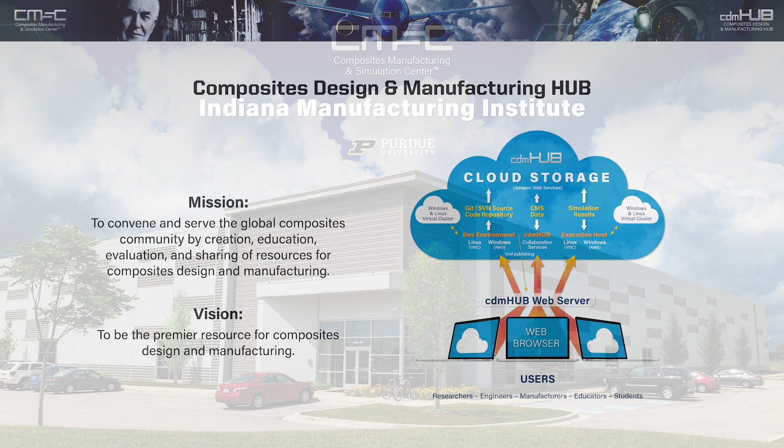We launched the CDM Hub in 2013 with the mission to convene and serve the global composite community by creation, education, evaluation, and sharing of resources for composite design and manufacturing.

CDM Hub provides a very powerful website called cdmhub.org for the composite community to carry out this mission together. We envision CDM Hub to become the premier resource for composite design and manufacturing in the near future.

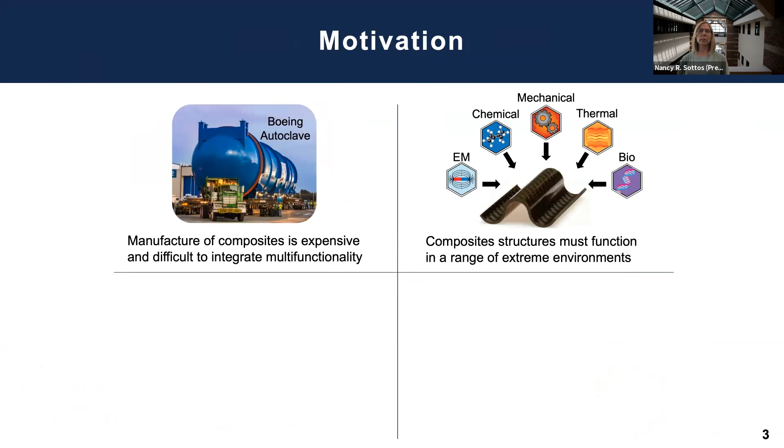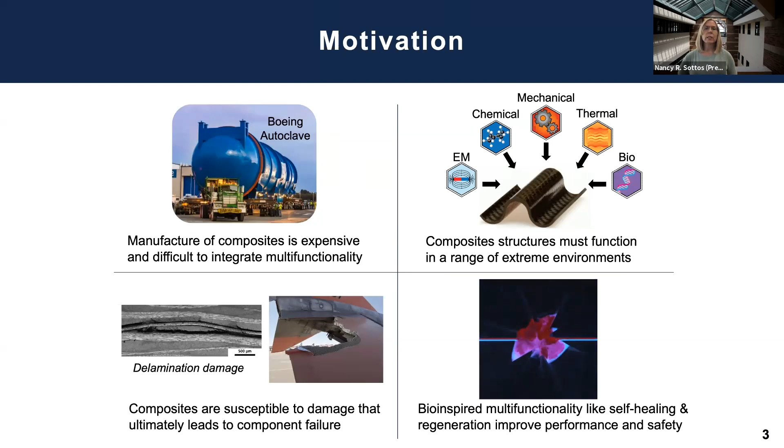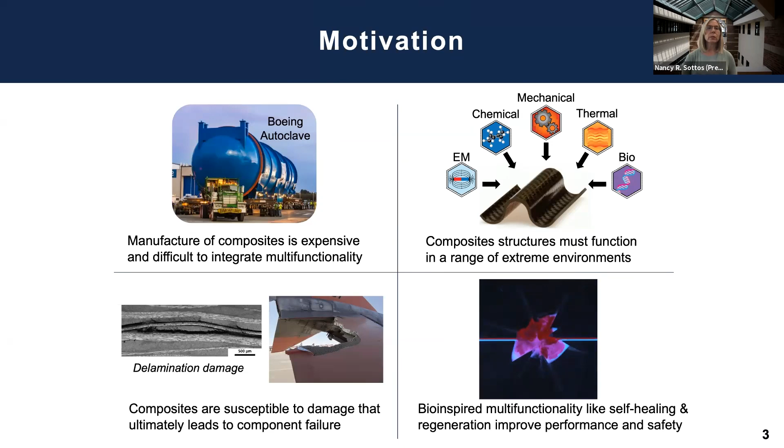In addition, composite structures must function in a range of extreme environments throughout their lifetime, and so they're subject to all sorts of damage that ultimately leads to component failure. My group over the years has been looking at different bio-inspired functions that can address these damage questions, like self-healing and regeneration, with the goal of improving performance and safety. My talk today, though, is going to focus on the manufacturing aspects, and I'll comment on multifunctionality and vascular structures towards the end of the talk.

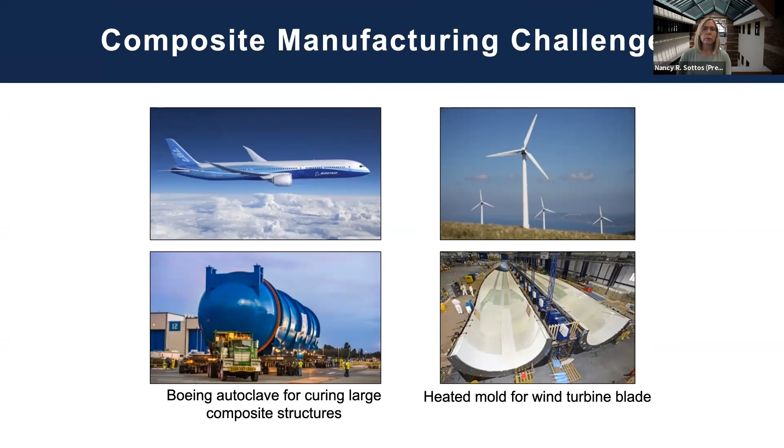I think everyone on this seminar series is well aware of the challenges associated with composite manufacturing. I show the large autoclave for aerospace structures, and also one of the large molds required for creating composites for wind blades. If we look at the well-known processing cycle for many aerospace-grade thermosets...

The first obvious element is that it requires lots of time, a minimum of 6 hours, sometimes longer, with high temperatures held for those long times, usually 2 dwells, and the heating rates are low. Sometimes the curing can be non-uniform, inducing residual stresses. The large molds and autoclaves require large capital investment and operating expenses, and you have to have these manufacturing facilities available. And of course there's a lot of energy input, which leads to CO2 emissions.

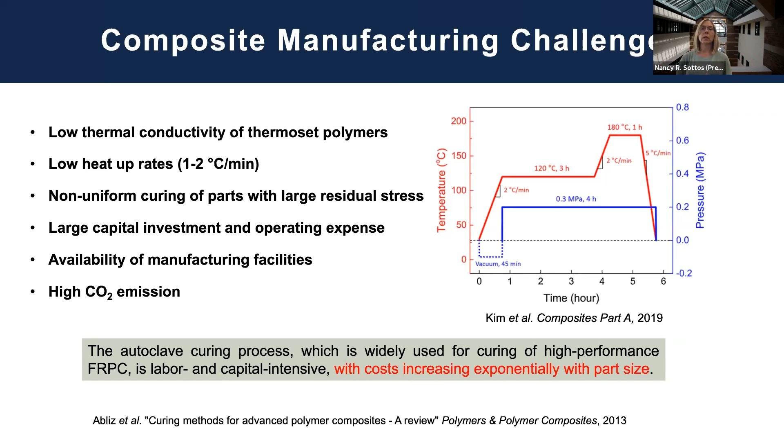So really the autoclave curing process that has been used for so long to make high performance composites is labor and capital intensive, and costs increase exponentially with part size because the autoclave has to increase in size with the part that's going to go inside of it.

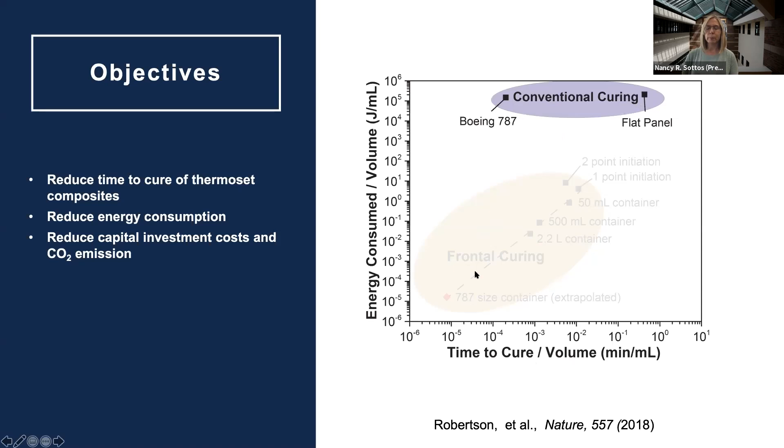So an outline for the things I'm going to cover today: I'm going to talk about a technique called frontal polymerization that we've been working on, which serves as a platform for our manufacturing methods. Then I'll talk about application to fiber reinforced composite manufacturing specifically, and finish with an exciting application to vascular structures and using this technique to make multifunctional composites.

Let's start out with frontal polymerization, and I'll assume many of you don't know a lot about it. This is a technique for processing polymers that has been in the literature for a while. If you're unfamiliar with it, there's a great review by John Pojman's group that references all the different polymers and monomers that have been polymerized using this technique. But let me tell you a little about what frontal polymerization means.

It's really like a controlled burn, but you start out with monomer. The monomer has to have a high heat of reaction. Then in that monomer, you also include a thermally latent initiator—in our case, a catalyst—and you need to stabilize that system to give you enough working time.

Then when you add a small amount of heat—think of it as a trigger that doesn't remain on—it starts the polymerization of the monomer. As I said, the monomer needs to be fairly exothermic. It generates heat, which diffuses forward into the surrounding monomer, generating more reaction, an exothermic reaction, which then diffuses forward, and the reaction propagates as a self-sustained front.

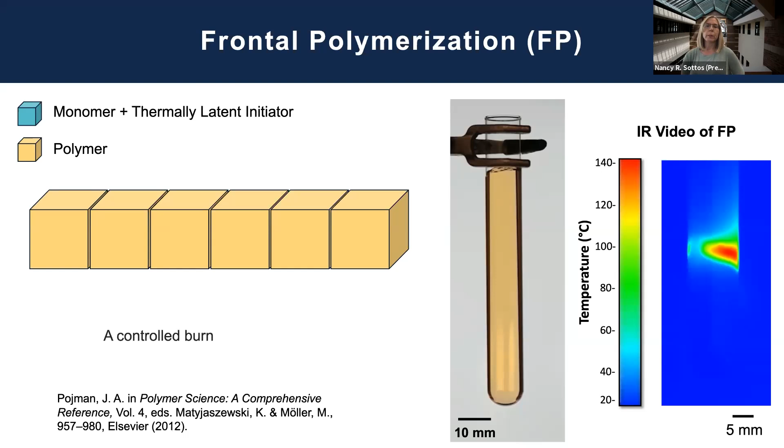If we look at this in an IR video—this is an IR of a different test tube, actually a little more zoomed in—it again started just after the point where it's been initiated with a soldering iron, just a small heat trigger. This will give you a feel for how the heat is generated due to the reaction.

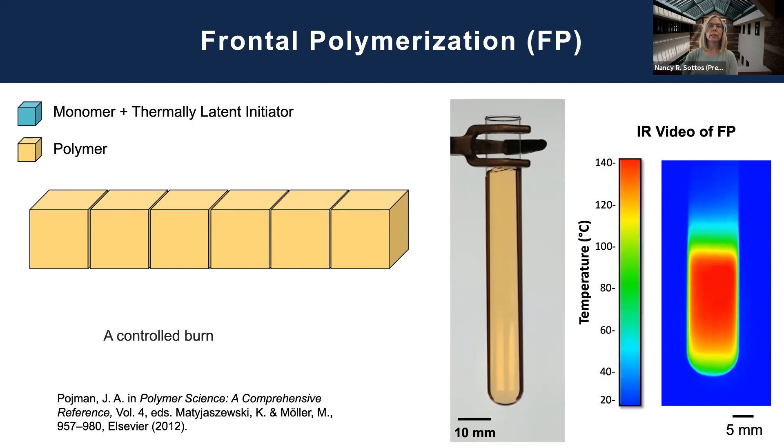And then diffuses and propagates down the tube. You can see red here is a hotter temperature. It starts to react, the heat moves forward, and the reaction front again smoothly moves down through the test tube, curing the monomer. Okay, and it's just about finished. If I take some snapshots and freeze them on this slide, you can see again that you start out with this stable monomer, and you can see the smooth propagation of the front.

I want to include the governing equations for this. This is a reaction thermal transport system where T is temperature, H of R is the heat of reaction—a property of the monomer. Kappa, rho, Cp are also properties of the monomer that determine the heat transport and diffusion. Alpha is the degree of cure, and I show the cure kinetics for a typical thermosetting polymer here. Alpha also depends on temperature and an activation barrier, E. We're able to analyze this set of governing differential equations to understand this reaction thermal transport process.

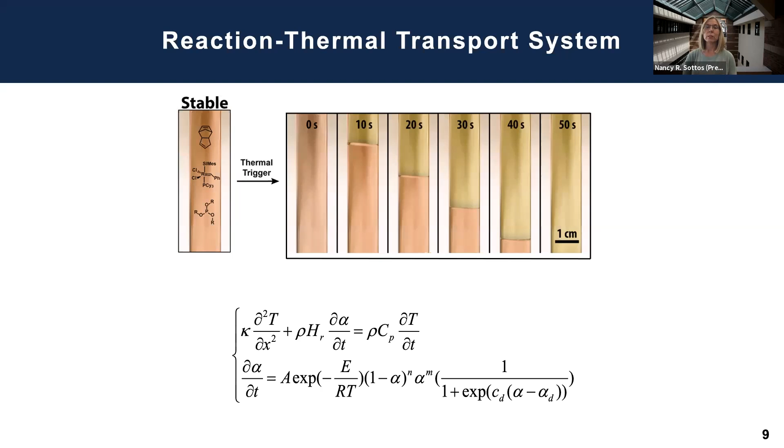Now, I won't have time to talk about the modeling this morning—that's the work of the Geubelle group. But we have a lot of predictive models that enable us to hone the manufacturing processes and understand them better, which I'm going to show throughout this talk.

Let me start out with the chemistry that our group has been focusing on, one particular monomer: dicyclopentadiene, or DCPD for short. We initiate a frontal ring opening metathesis polymerization using Grubbs catalyst, in particular GC2.

So the chemistry we're working with is the DCPD monomer. It's endoform, ethylidene norbornene, or ENB, that is added to make this a liquid at room temperature, along with the Grubbs catalyst. I'll say some more about these inhibitors, which are incredibly important for stabilizing the systems, and one of the big advances our team made, led by the Moore group.

What these inhibitors do in working with this monomer is allow us to move from the test tube, from a very small volume doing frontal polymerization on a very small scale, to larger molds. Here I just show a casting mold of our dicyclopentadiene monomer.

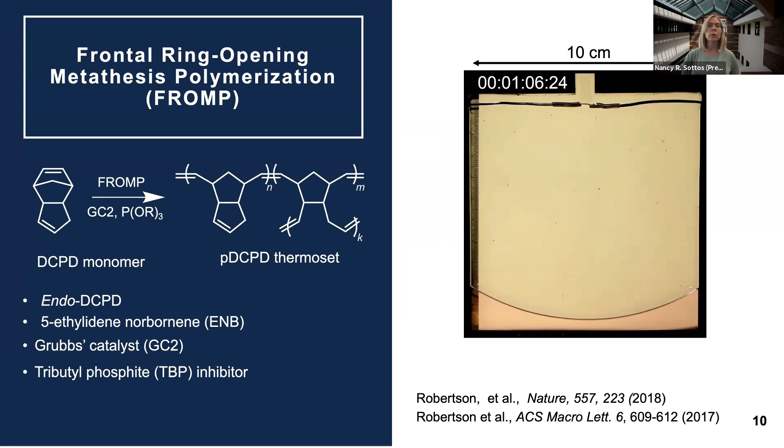The heat trigger here is a resistive wire, and it's only on for less than a second. You can see a smooth polymerization front progressing throughout the mold, and what we wind up with is a thermosetting polymer, polydicyclopentadiene, by the time all the monomer converts.

This thing is cured with just 6 joules of energy in 78 seconds on a desktop. The front velocity is about a millimeter per second. The degree of cure is quite high, but what's most remarkable to me is that the glass transition temperature of this material is 160 degrees C. It's got a Young's modulus of about 2 GPa and a good elongation of failure, about 50%.

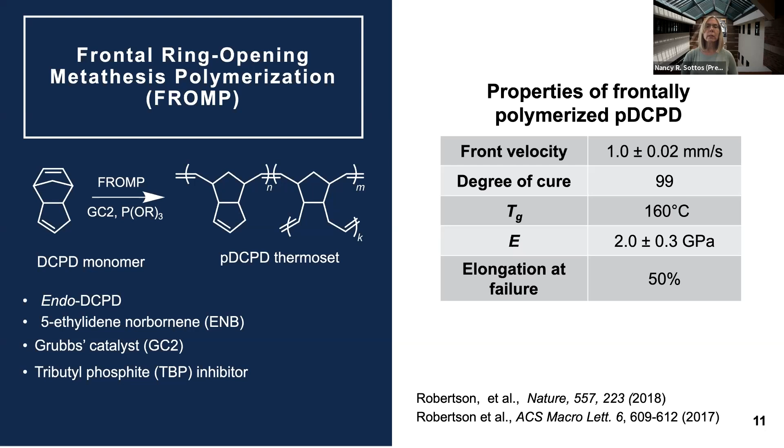So it's got great engineering properties comparable to those of an aerospace grade thermoset. Here I show a comparison of those properties to a typical aerospace grade BPA epoxy.

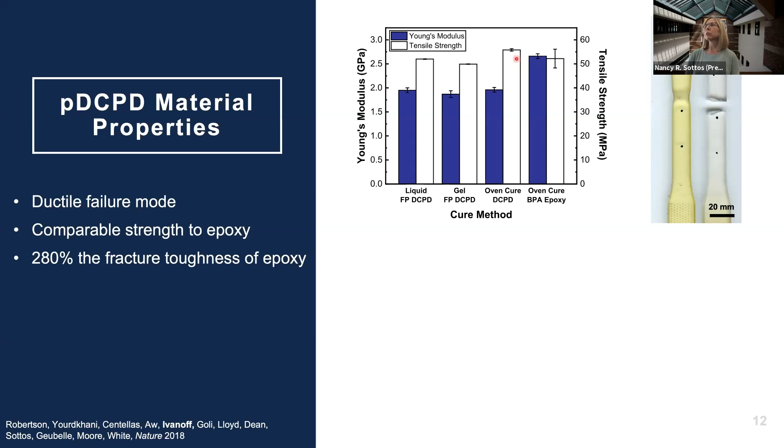When we started out, we were very careful to compare our frontally polymerized materials to if we just cured them in a traditional oven, versus a traditional oven or autoclave cure of the BPA epoxy, looking at the modulus. The modulus of DCPD is about 2.0 compared to 2.5 of an epoxy system, and the tensile strength or yield point is rather comparable.

What's also interesting is that dicyclopentadiene is a very tough material. Its fracture toughness is about 280% greater than that of a typical aerospace epoxy. So it's quite a high-performance polymer.

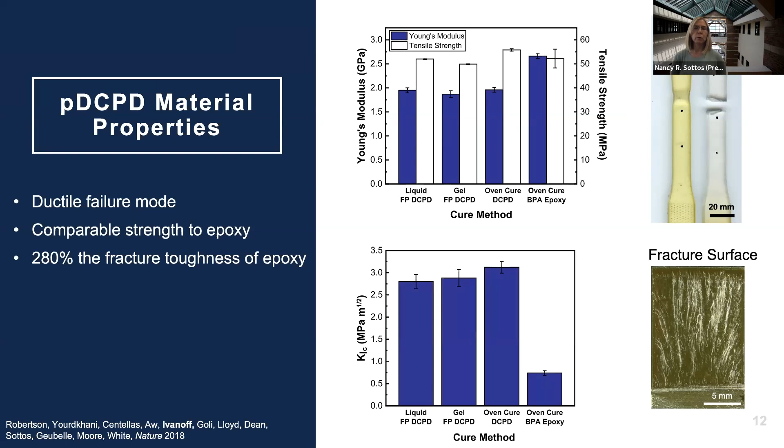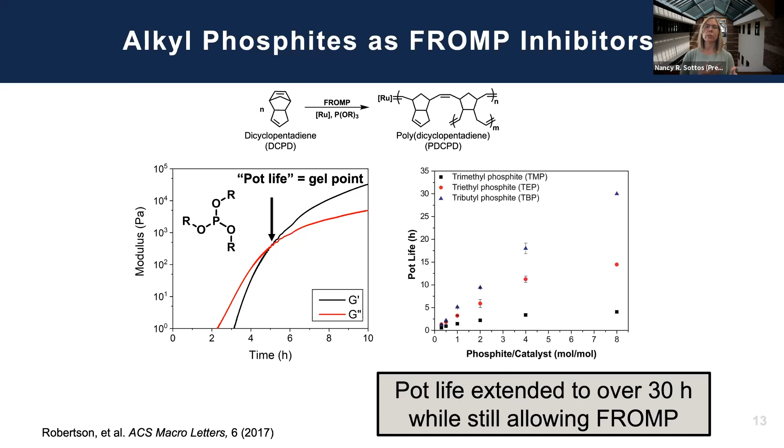The amount of this phosphite inhibitor lets us tune where this gel point occurs. So we can look at a plot of pot life or gel point as a function of inhibitor and catalyst concentrations. What we found is that with these inhibitors, we're able to get over 30 hours of pot life in some systems, which enables us to do larger molds and structures, and as you'll see as I go through the talk, enables a lot of different things.

The other thing we discovered in this system is that with the use of these inhibitors, we have a lot of control over the rheological profile, and that control over the rheology really enables high fidelity in our manufacturing processes as well.

By tuning the gel point with the amount of inhibitors, we have three different regimes. Two are useful, but one is important to realize where it is. The first is what we call liquid FROMP, or frontal ring opening metathesis polymerization—meaning we polymerize from the liquid, like in the test tube and the casting cell I showed before. This is very useful for resin infusion of composites.

If we let it go beyond the gel point—this was actually a very surprising fact to us—we can go beyond the gel point and there's still enough energy to frontally polymerize, which enables us to process from the gel and do things like 3D printing and gel shaping, as you see here.

And then finally, if this goes too far, beyond the pot life, a background reaction will take over. It'll polymerize into an undesirable polymer, and you just don't have enough heat of reaction (HR) to propagate the front. So you want to stay away from that zone.

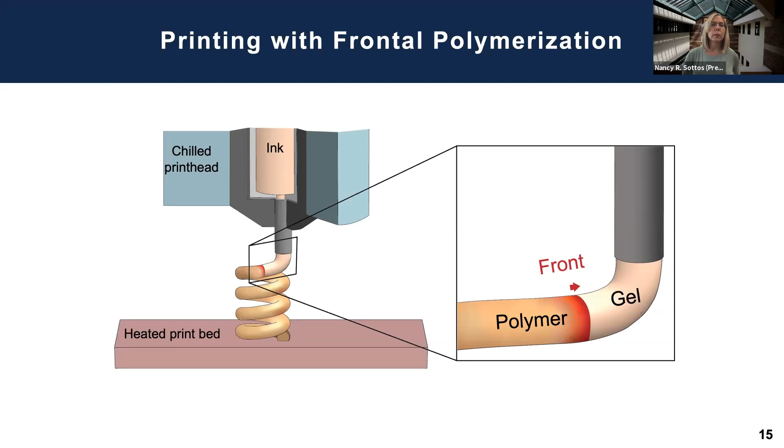We use a heated print bed to trigger the front, and as you'll see, the front then is able to follow the print head, and we're able to cure in real time and basically 3D print on the fly. So I'm going to show an example of freeform 3D printing in air.

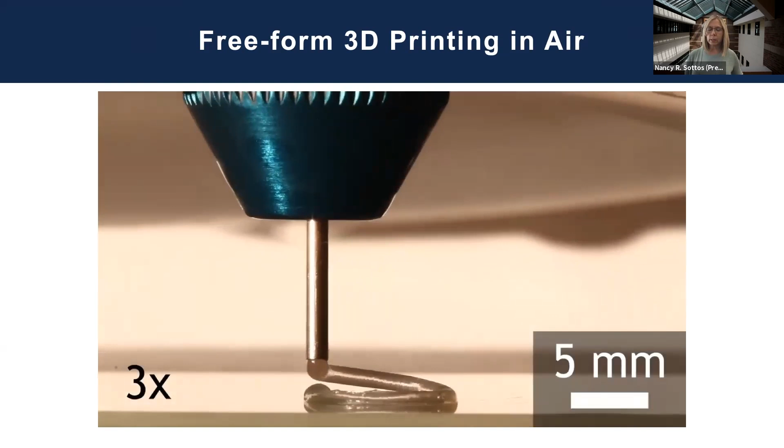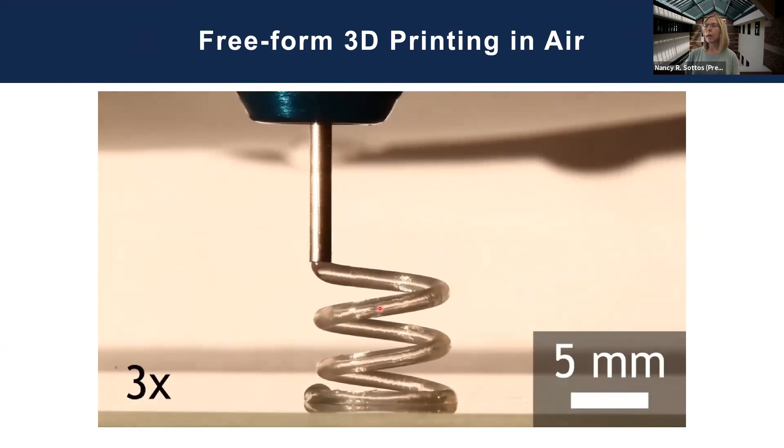This has been triggered on the heated print bed, and as this cycles up, you can see the front here chasing the print head as it goes through this freeform spiral. Everything behind the front is a cured thermoset polymer, again with a Tg of 160, and it's just gel in that small segment close to the print head.

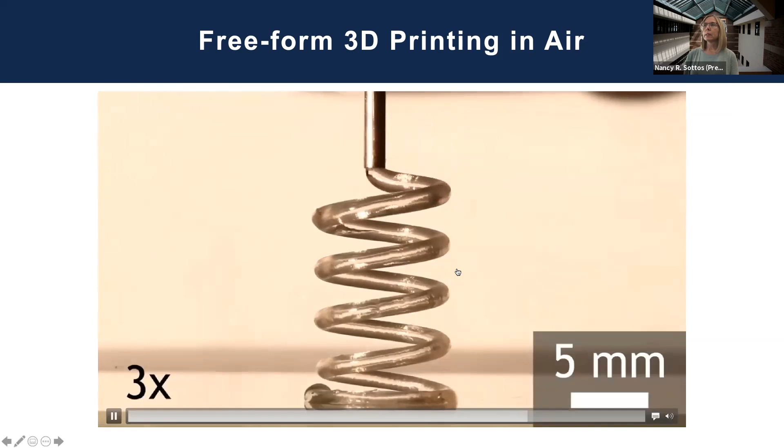You see this video will finish soon. And when it completes, you can see it's fully cured thermoset. There's no secondary curing necessary.

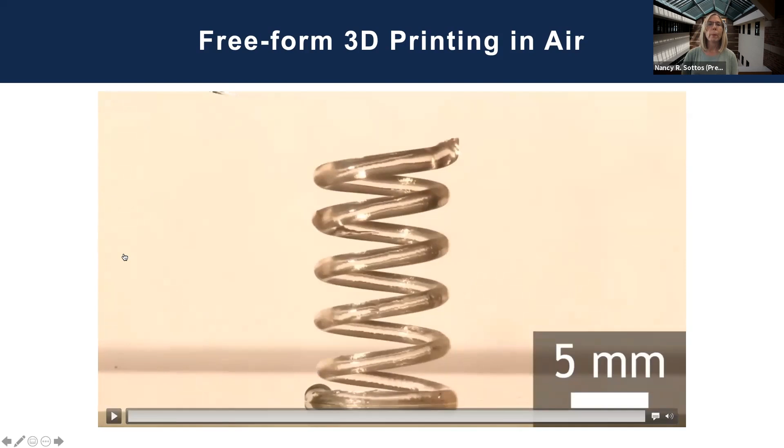I don't have time to discuss all the interesting rheology and different things that we're doing with printing for this presentation, but I picked one example, also just to show the layer by layer capabilities of using different nanofillers. That's definitely an area we're interested in, working on and adding different nanofillers, carbon fillers, as well as even thinking about continuous carbon fibers.

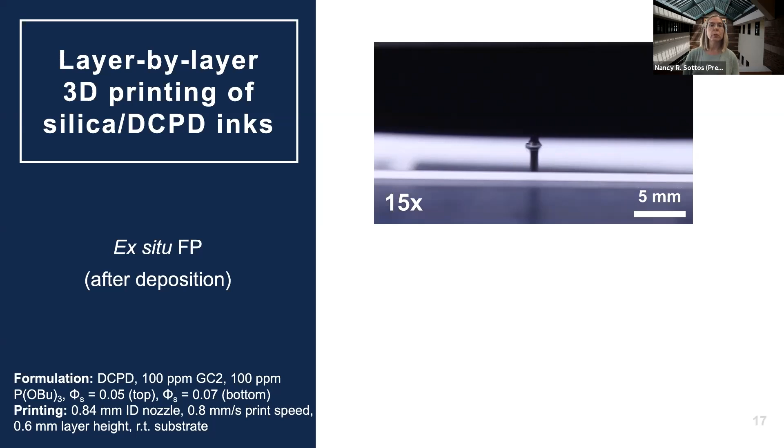In this case, I show an example of layer by layer printing where we've added fumed silica nanoparticles to the DCPD. It also gives us another knob to tune the rheology, and you can see that we can create an ink with a very different viscosity. This one's gelled a little differently, and here we're just creating an annular structure, layer by layer.

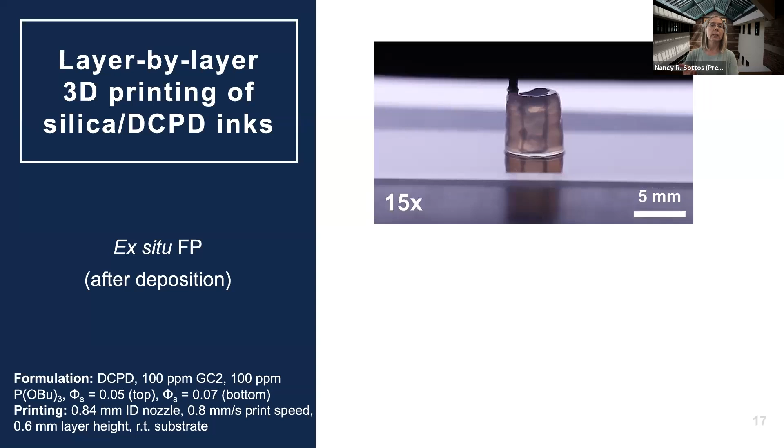This is a little bit different example, because instead of curing on the fly, in this case we're just writing with the gel-based ink. As you'll see, the frontal polymerization is going to be initiated ex situ.

So there's our structure, and there's the soldering iron in this video. You can see it's just going to be touched there for a second, and this whole thing will now frontally polymerize after the fact. So that's a case where we're not using the heated print bed—we're polymerizing afterwards.

We can also photothermally initiate these frontal polymerizations in our printing process. It gives us the ability to make a lot of different types of structures and combinations of layer by layer and freeform printing as well.

All right, so let me move on to the fiber reinforced composites manufacturing. As I mentioned, this is going to happen from the liquid state, so we have a working time of several hours.

The way that we've chosen to make our composites in this initial work is using a resin infusion process. In particular, we're using a vacuum-assisted resin transfer molding process and infusing our DCPD monomer into woven fiber mats. In this case, it's a Toray twill carbon fabric. Basically, everything else, once you infuse the resin, is very similar to a normal RTM process, except that we're just going to initiate this with a small heat trigger.

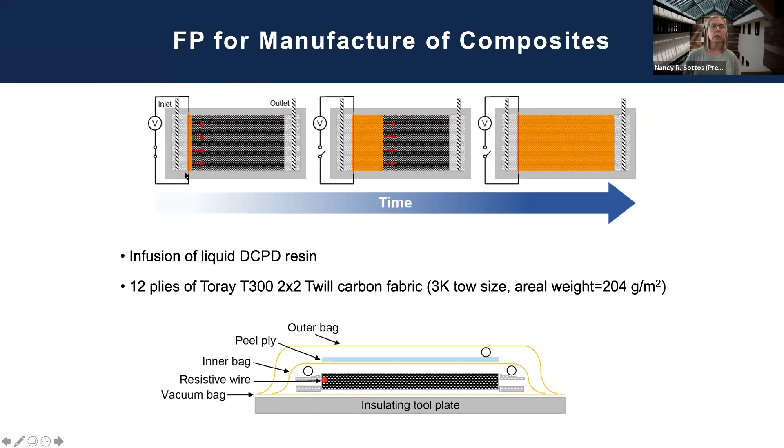The location of the trigger will vary, but we started out with the trigger on one side of the composite and let it move smoothly, the front propagating across the panel. So that's what I'll show first.

So we start out with this single trigger processing configuration. There's a heat trigger, and then the resistive current is just turned on for a short while, and then the front propagates across the panel. What I'm going to show you below in the video is an IR image where the IR camera is looking down on the panel.

This is a fairly good sized panel, a 10 by 20 centimeter panel. You can see the current is on—that's just how we initiate it. The front starts moving across the panel, and we get this stable propagation as the exothermic reaction occurs.

We are able to fully cure this panel, a 10 by 20 centimeter panel, in just 2 minutes, again on a desktop with very simple tooling.

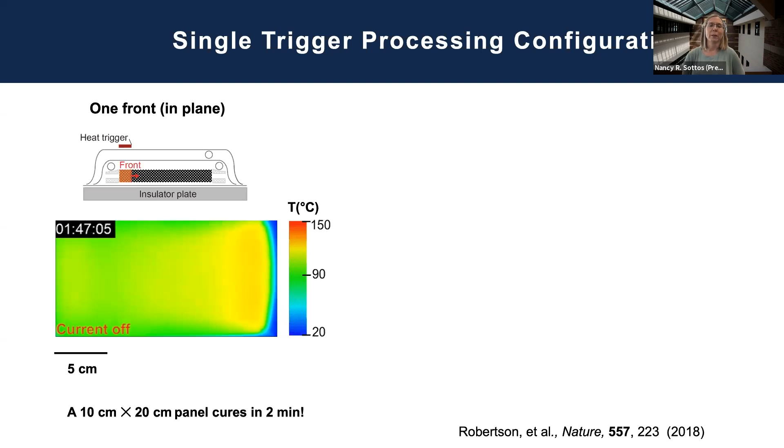We can make larger panels and more complex shapes, and the volume fraction for this woven material is about 51%, with very low void content. We've moved to a system with no solvent in the resin, and the TGs we've achieved approach 160 degrees C for the composites.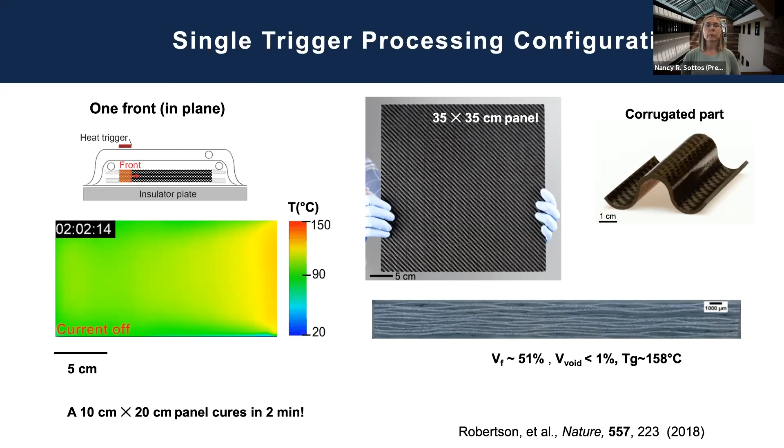It looks like everything's working well in the video, but there's an important effect of adding fibers and other fillers to the frontal polymerization process. Every time you add filler, it's not reacting, not generating heat, so you're taking away monomer that generates the heat necessary for processing.

If we look at a plot of front velocity as a function of fiber volume fraction, initially as we increase fiber volume fraction to say 20%, there's actually an increase in front velocity. That's because the fibers are more conductive and let the front propagate more smoothly across the panel. Then as you add more fibers and reach higher volume fraction, the front starts to slow down again and can actually stall, because you have less monomer there.

In addition, the maximum front temperature comes down as I add more fibers, because the front is less hot due to the heat dissipation, and that's also important.

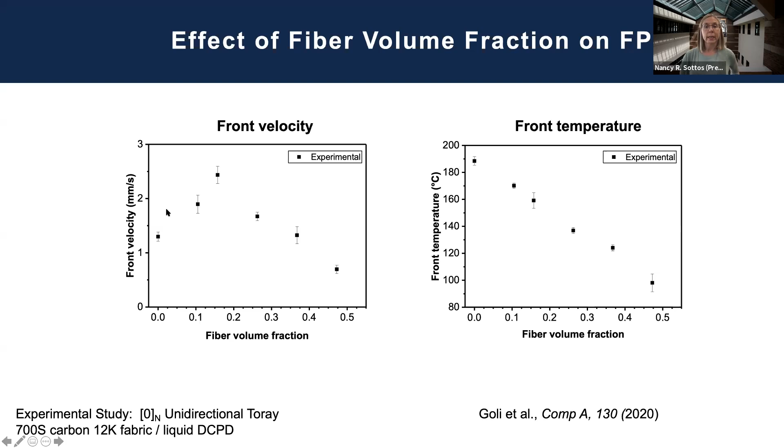There's a recent paper on this led by the Geubelle group that was able to predict these experimental trends quite well, helping us numerically predict the processing windows we need.

In order to get volume fractions up and address these issues with increasing fiber volume fraction, we thought a lot about how to modify the boundary conditions. Our initial layup, as described before, led to volume fractions of about 52%.

We've done a lot of work modifying this using insulative plates, so the laminate is compacted between two insulator plates, and we also add some compaction pressure to the process, whereas in the prior example we weren't doing any compaction. This does two things: it minimizes heat losses and increases fiber content. You can see we get a nice 62% volume fraction composite shown here.

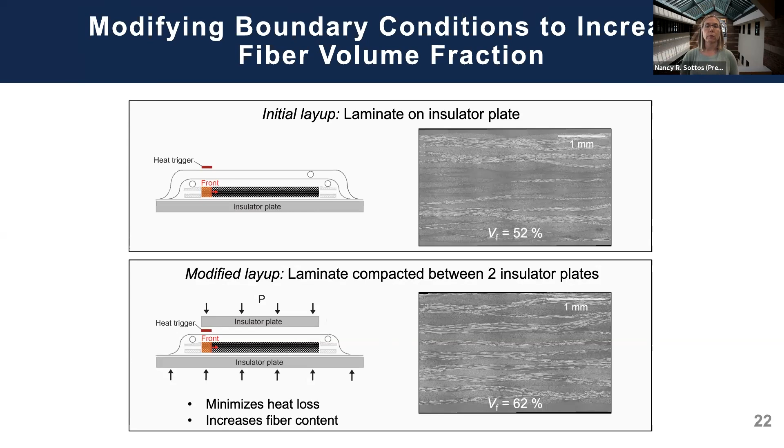So the compaction step works quite well and is helpful for producing high quality composites. As parts scale and get larger, you're asking a lot for a front to propagate meters, so we looked at different alternate triggers to reduce cure time and the distance the front propagates.

We've studied two fronts, triggered from either end of the panel in the plane. They're going to meet in the center - I'll play that video. You can see the current's on, it's triggered, then the current is off, and these two fronts come together and merge.

You'll see there's a bit of an exotherm when they merge, and this is something we have to manage and have looked at how to minimize. We've also looked at a through-thickness cure, where there's a heater at the bottom and it cures through the thickness of the material very rapidly.

In fact, the two-front cure takes half the time of the one-front case, as you might expect. The through-thickness cure takes about 30 seconds as we go through the thickness, and that's an exciting technique for more practical manufacturing.

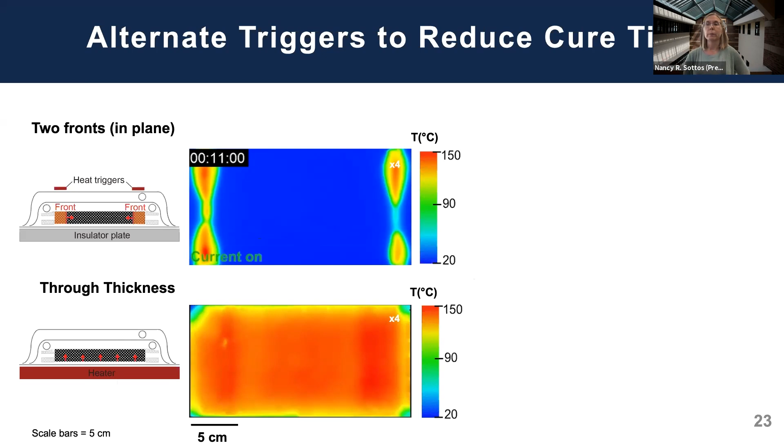If we compare these, there's a bit of a trade-off between a faster cure time, because we need to put more energy in, say, for the through-thickness case. The cure time comes down from 2 minutes to 1 minute to approximately 30 seconds to cure a composite panel.

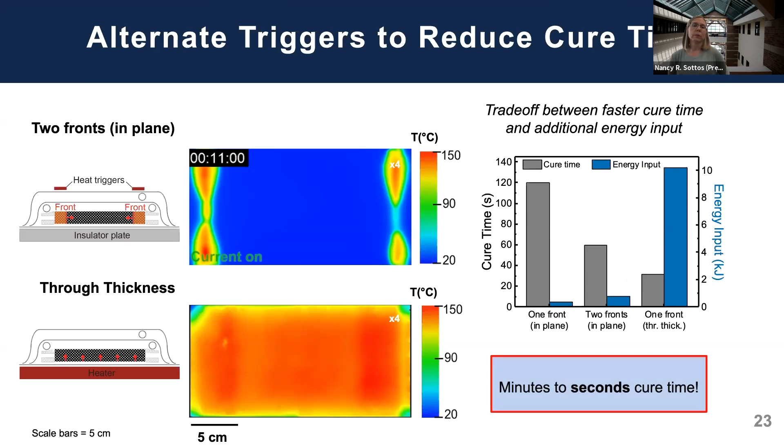Correspondingly, on the energy input side, one front uses the least energy, a very small amount, twice the energy for two fronts. Triggering with the heater underneath requires a bit more energy - nothing close to an autoclave, but still significant compared to the other methods. So we've gone from minutes to seconds in cure time, but at an energy penalty.

We have also been exploring this through-thickness process with some pressure and compaction, which really leads to high quality composites and interesting methods of making multifunctional structures, as I'll talk about at the end of the talk.

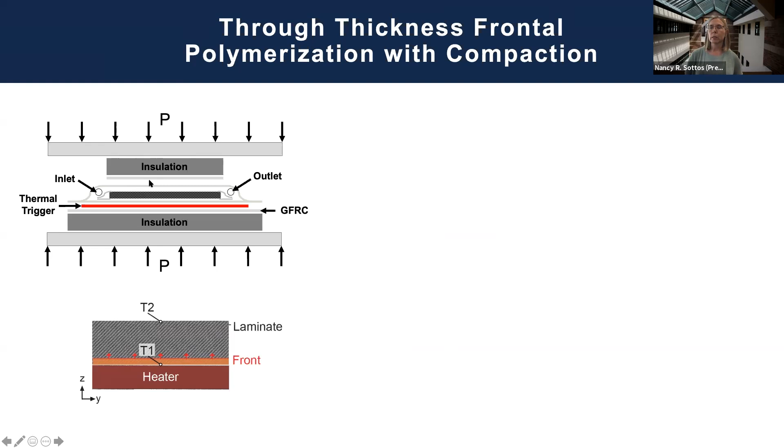I'm going to show you some heat profiles. Here's our through-thickness configuration where we've got the heater underneath the panel. The front propagates in the Z direction, and I'll show the profiles from two thermocouples: one at the heater, one at the top of the laminate, just to give you an idea how this works.

This through-thickness technique with compaction leads to some very nice materials. We can have very short trigger times and short cure times, again about 30 seconds, and very high volume fractions, so 65% volume fraction, as I mentioned before.

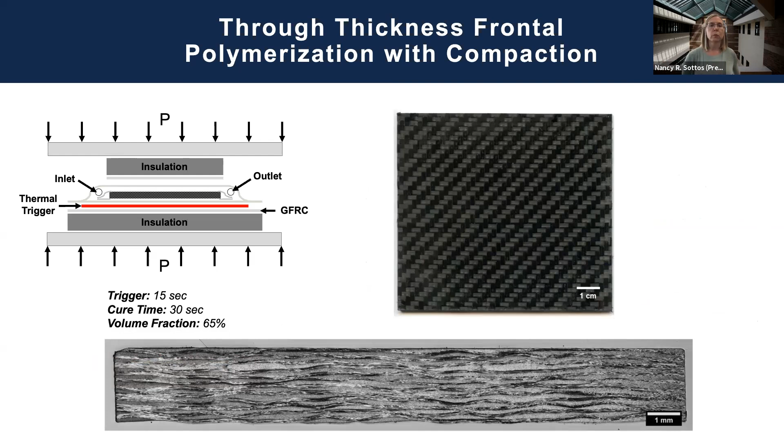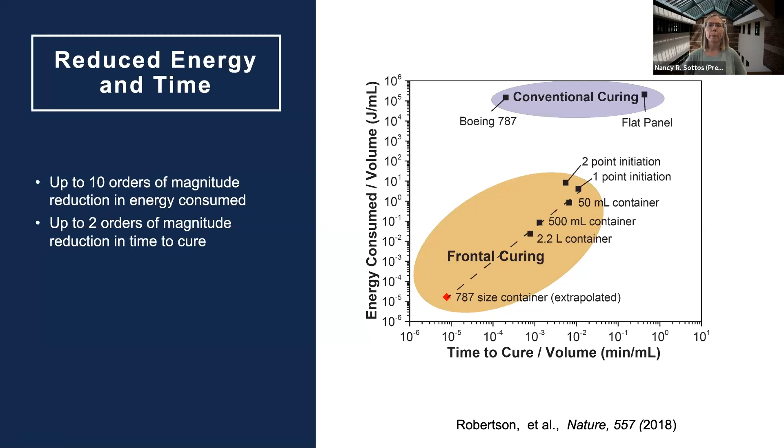Moving on to the properties of these composites, we compared our composites to conventional oven-cured epoxy composites for the same weave and same volume fractions. You can see this is the frontally polymerized system, an oven-cured system, and then a similarly oven-cured BPA epoxy. The properties are slightly lower for the DCPD composite than the epoxy material.

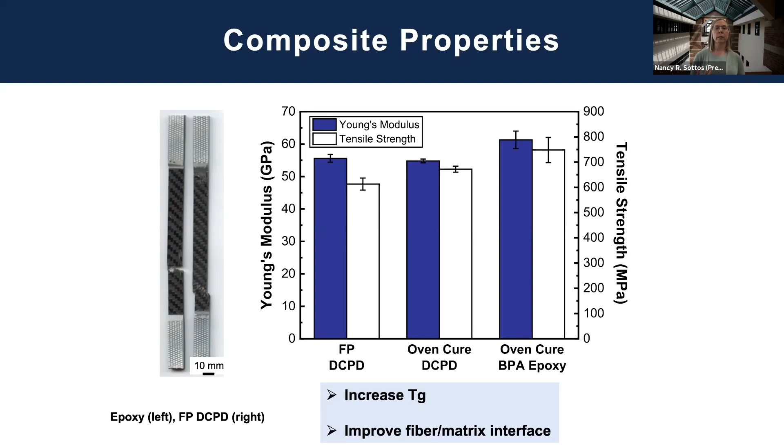This is an area where we're continuing to try to improve. There have been two things we've focused on: increasing the TG of our composites, basically getting the cross-linking up, and improving the fiber matrix interface. The Toray fibers we've been working with are largely optimized for epoxy systems, so we've been working on different fiber surface treatments to improve adhesion with dicyclopentadiene.

I'll just quickly touch on recent work in these areas. The first is increasing the glass transition temperature, work that was just published last year. What we stumbled into was working with short chain esters, these norbornene-based crosslinkers, by adding different concentrations of this crosslinker into our DCPD resin.

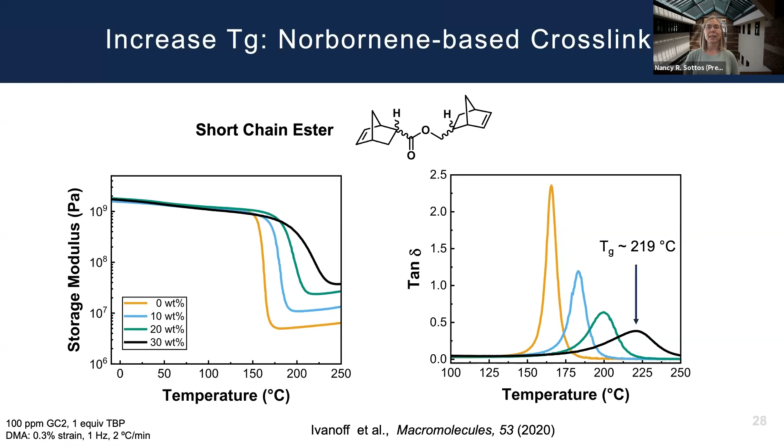You can see by these DMA curves that the rubbery modulus is changing quite a bit, as well as the glass transition temperature, indicating increased cross-linking. Looking at the peaks in the tan delta, we're pushing the TG out from about 160°C without any crosslinker to up to 220°C at the highest concentrations. I think it's quite remarkable that we're getting a 220°C glass transition temperature on a desktop, with very simple molding and very small amounts of energy input.

Again, the amount of crosslinker is also affecting the mechanical properties, so the ductility of the polymer is going down, but it's still pretty tough. Yield strength is going up with crosslinking, and elastic modulus is also going up with crosslinking, as you might expect.

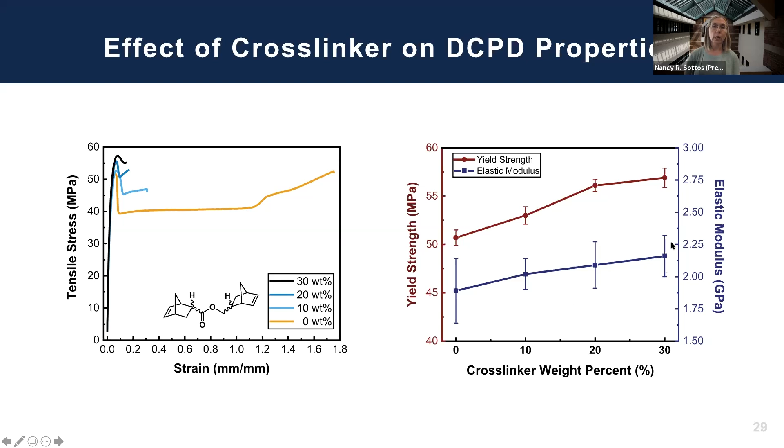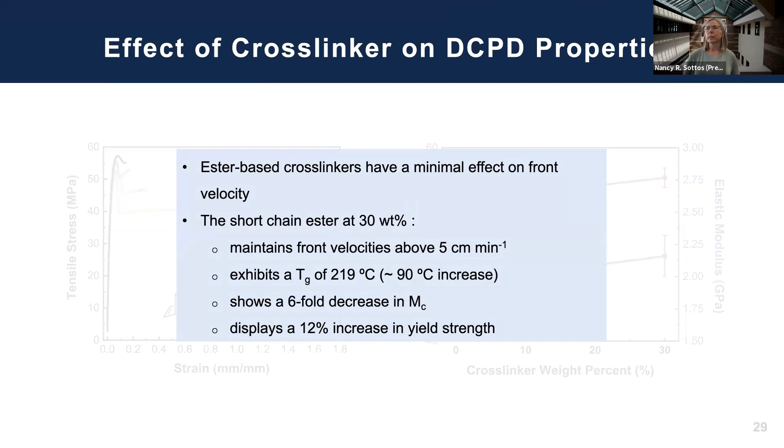Of the neat resin, we've also incorporated, so just to summarize that quickly, these ester-based crosslinkers have a minimal effect on front velocity, which was an important element of this study, because everything you add to the system could take away from the frontal polymerization process. And we are able to get these high TGs and increases in stiffness and yield.

We then incorporated the short chain ester into a composite, which was no small feat since we're synthesizing this all here at U of I. But again, we chose to go with the through thickness curing method.

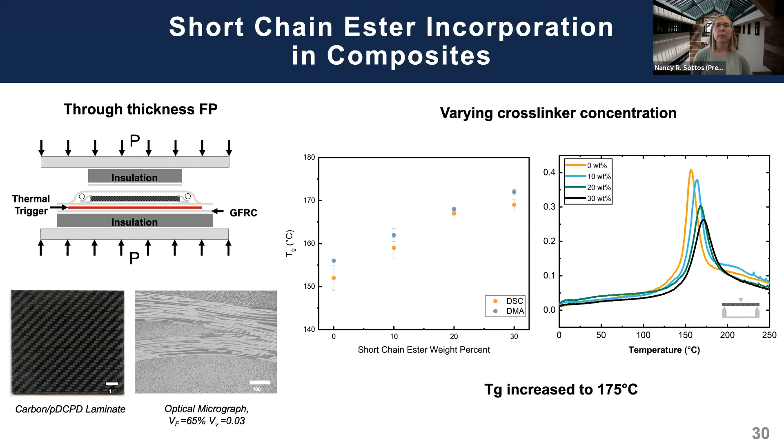You can see, again, the DMA summarized for the composite on the right-hand side, that by increasing the amount of cross-linking agent, we get our changes in glass transition temperature of the composite. So we're able to push up our TG of the composite from 150, and approximately 155, 158, all the way up to about 170 for the composite. So the increase isn't as significant as for the neat resin. That's a really interesting question that we're still trying to figure out, why we're not seeing quite the same increase in TG in the composite system, and it's an area of ongoing research.

All right, so what I'd like to finish with is how we use these manufacturing techniques. Clearly, they can be used for, or there's real promise for, fiber reinforced composite manufacturing.

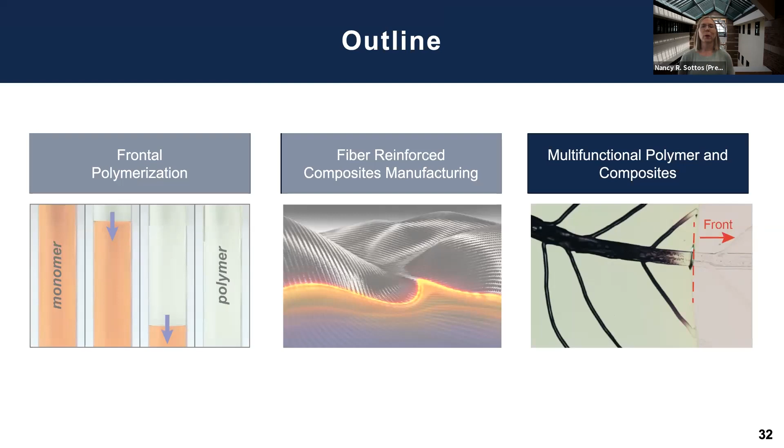But as many people know, our team is very interested in multifunctional response and imparting things like self-healing and other types of responses. One of the methods that we do that is by putting a vascular network into composite structures. Multifunctional vascular composites can do many things.

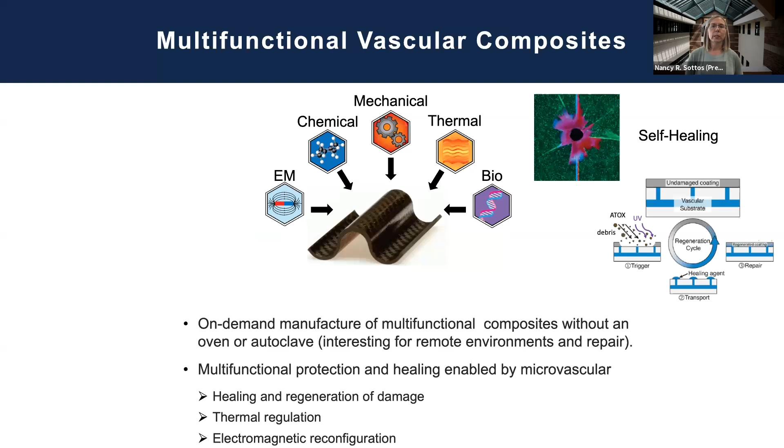Basically healing and regeneration of damage. So we've made self-healing structures. We've made self-cooling composites. Here you see an image of just one of these cooling channels in a complex curved corrugated composite structure. And we've used them for electromagnetic reconfiguration as well, where we're running a conductive fluid. So the functionality depends a lot on what fluid you're running through the vascular network.

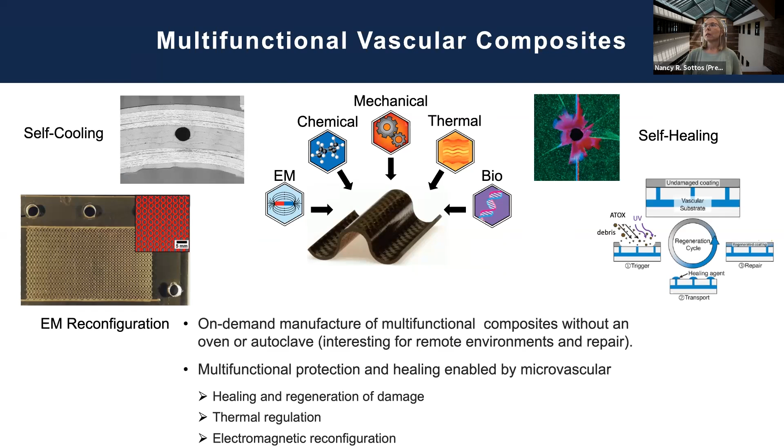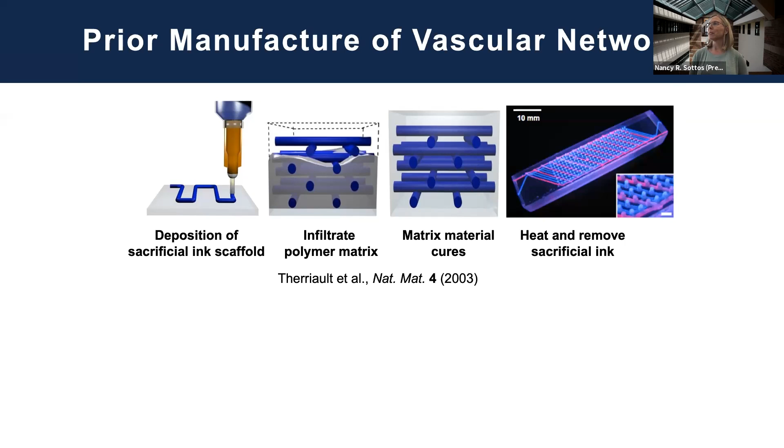Now, we've spent a number of years pioneering different techniques to make these vascular networks. This is a technique that we actually worked on with Jennifer Lewis's group, where we started out just using ink scaffolds that were 3D printed. That sacrificial ink was then polymerized in a polymer matrix. You heat it, you get rid of the ink, and you can get pretty complex vascular networks in polymer components, and they're relatively small. There's a lot to this process.

And we quickly realized that it was limited, especially towards aerospace grade composites, that the sacrificial inks just wouldn't survive in a composite and hold their structure.

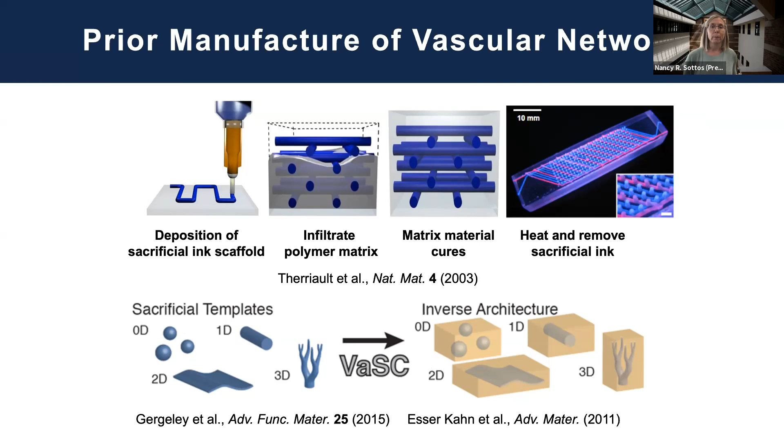Then we moved on to this process we lovingly called VASC, which is vaporization of sacrificial components, where we did a lot of work on developing sacrificial polymer templates that would be embedded in the polymer, that can survive the cure cycle and then go through a second heat cycle to vaporize the material and leave the architecture that you want in forms of empty channels or networks.

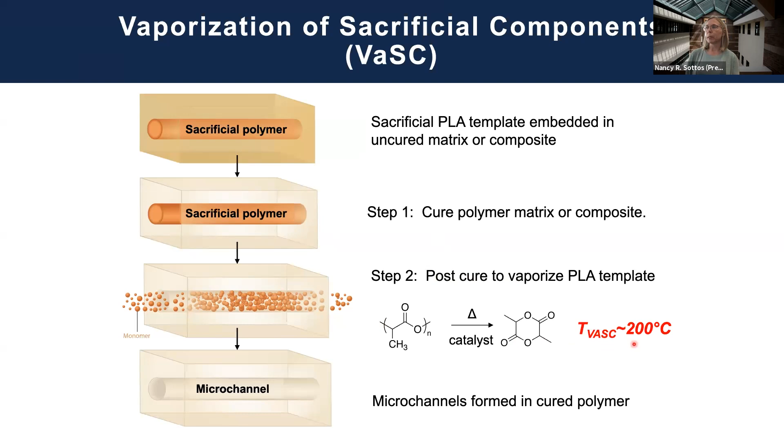Just to say a little bit more about this process, we start out with a sacrificial polymer. In general, that polymer was polylactic acid, PLA, and we cure it in. It survives the cure cycle, but then it needs a post-cure cycle to get rid of the sacrificial template, and ideally it vaporizes. The vascularization temperature for some of our prior materials was about 200 C. I'll say a little bit about the timing on that. But when you're done, you get these beautiful microchannels in the polymer or the composite.

Some of our early work, this is just one of those cured composites. Over on the right here, I show PLA, a glass epoxy composite with PLA fibers that are undulating with the undulation of the weave. Some of the weave fibers have been replaced, the 3D weave been replaced with these sacrificial fibers.

And what we wind up with is this beautiful composite with vascular channels. But to make this composite on the bottom, we had to go through the conventional cure cycle. In this case, it was an 8-hour cure cycle, and then what we called a VASC post-cure, which actually took up to 16 hours at 200 C. So while it was quite successful, we weren't worrying about the energy it took to do this, and it has some limitations, as you can imagine, trying to get something through a cure cycle like that.

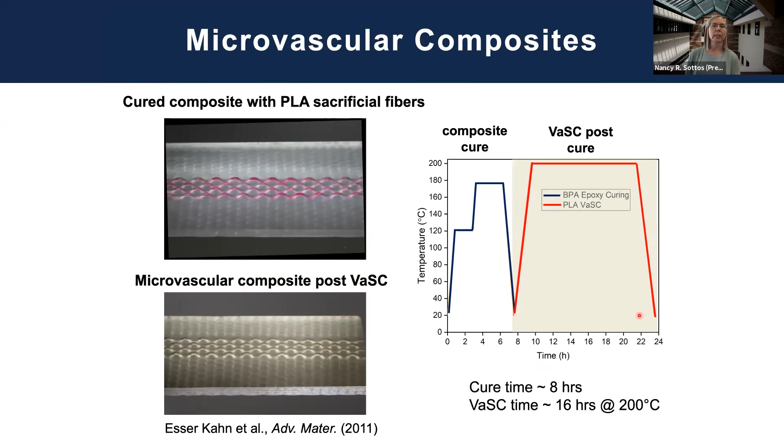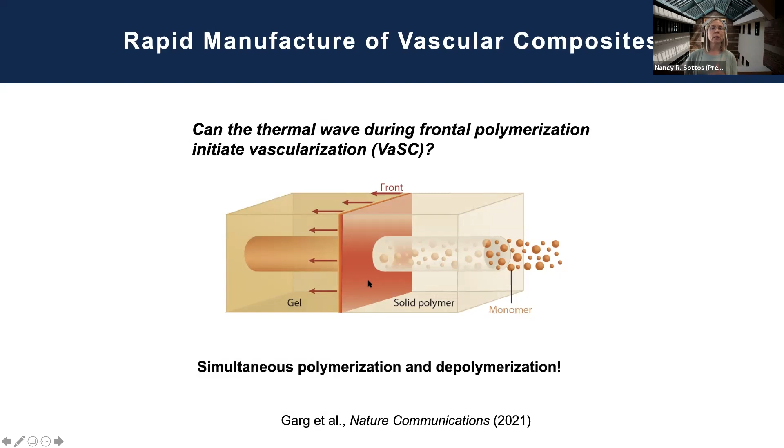So as we got started with our frontal polymerization process, we asked this question: can the thermal wave during frontal polymerization, where we've got a lot of energy—sometimes quite a bit of excess energy depending on the monomer and the boundary conditions—can that initiate vascularization? Can you have simultaneous polymerization and depolymerization: polymerization of the monomer and depolymerization of the sacrificial template?

The current postdoc and former PhD student, Mayank Garg, stumbled into this really interesting low temperature sacrificial polymer, polypropylene carbonate, that's been dosed with a photo acid generator, and it's able to degrade at fairly low temperatures. In fact, roughly around 90 degrees C, which was perfect for our application, and it's able to do it fairly rapidly at those temperatures.

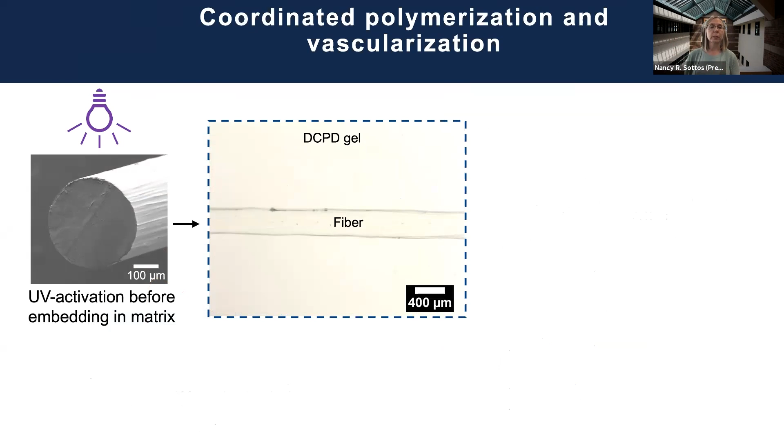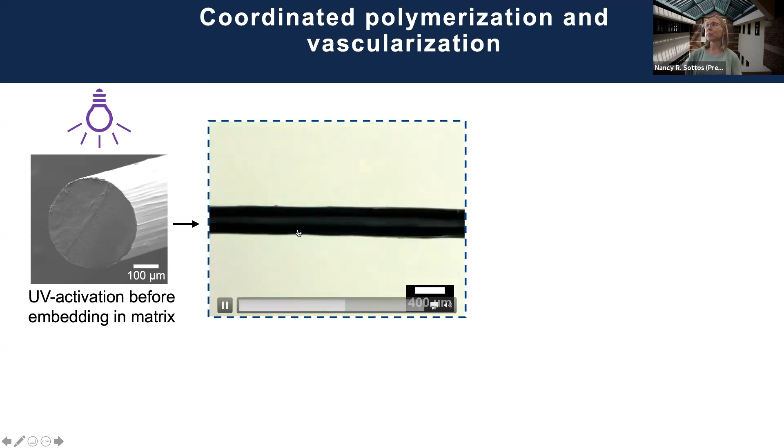It's going to be triggered from left to right, and what you'll see is the polymerization front and the depolymerization front moving right here. So there's the polymerization front, and there's the depolymerization front lagging behind, as the material on the outside goes from monomer to polymer, and the material on the inside goes from polymer to monomer and evacuates, so that we get nice open channels in our DCPD.

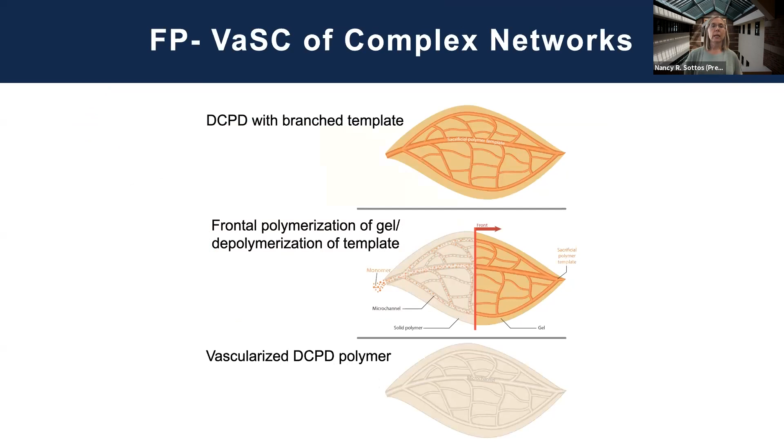We can look at them under micro CT, and they actually really have nice fidelity. We are able to extend this into more complex networks where we 3D print the sacrificial template, embed it in, and then vascularize it using the frontal polymerization.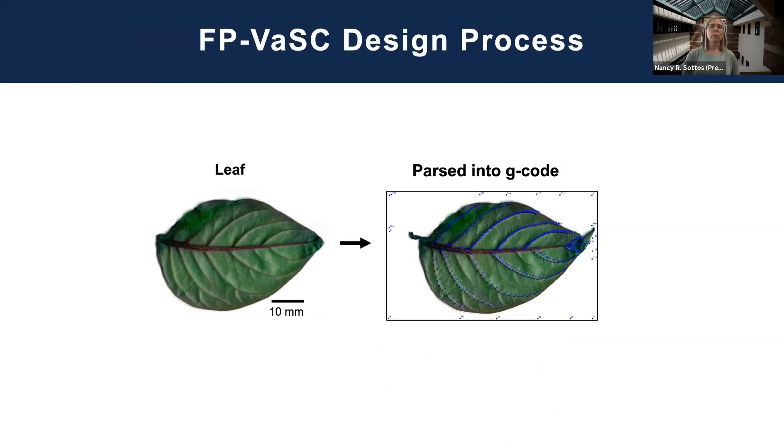So this design process, in this case, we started from, as an example, a leaf. We digitize the leaf and parse it into G-code to create our sacrificial template. And this is what that template looks like embedded in our DCPD monomer.

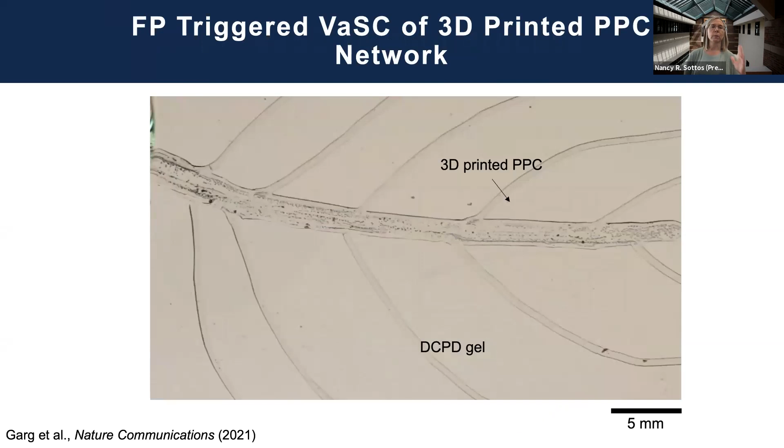Again, the front is going to go from left to right, and you're going to see this polymerization process of the outside polymer material and the simultaneous depolymerization of the template in this fairly complex architecture. It's just a fun video to watch.

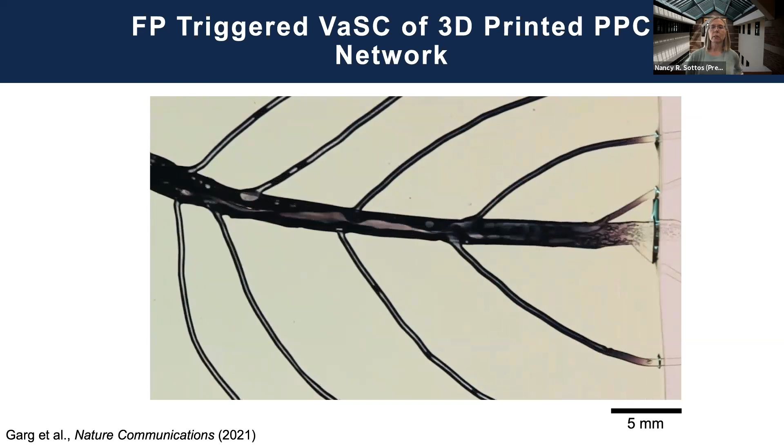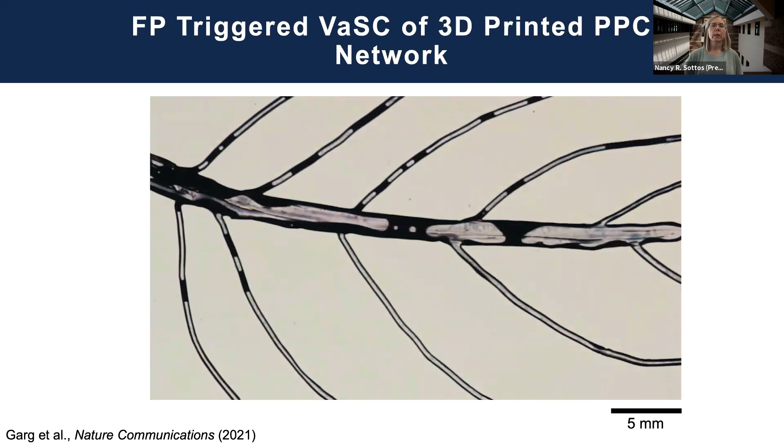And what we are left with, after this is evacuated out—and usually we just rinse the channels a little bit to get rid of any residual monomer—is our leaf-like structure that we're able to create quite rapidly without the use of a high-temperature oven.

And this work just appeared two weeks ago in Nature Communications, so there's a lot of details of the process in that. What I'd like to finish with, though, is that we've been able to extend this process from the pure polymer to the composite, so we're able to do this rapid, essentially one-step or tandem manufacturing of vascular composites.

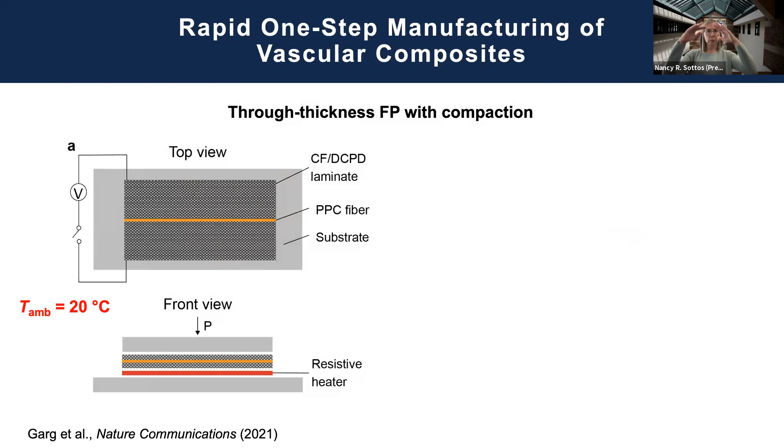So we put basically our PPC fiber in. Again, we're going to rely on the through-thickness cure to evacuate these in a composite. And we're quite successful, even though the reaction temperatures in the composite are somewhat lower than in the neat resin—the maximum front temperature. But you can see that we've fully evacuated a vascular channel in this woven composite.

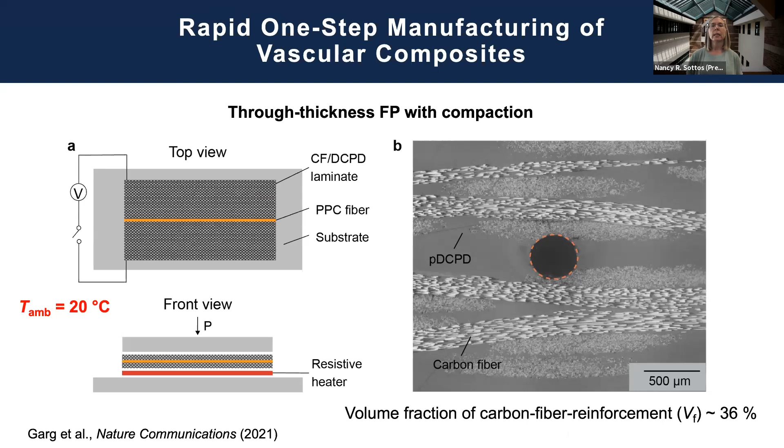The example shown here is a fairly low volume fraction fiber reinforcement. As I add more fibers, I lose heat. But in the end, we're able to reduce this cure time down to roughly 30 seconds from almost a 2-day process before. That's 10,000 times less energy and 1,000 times faster. So that's a good result.

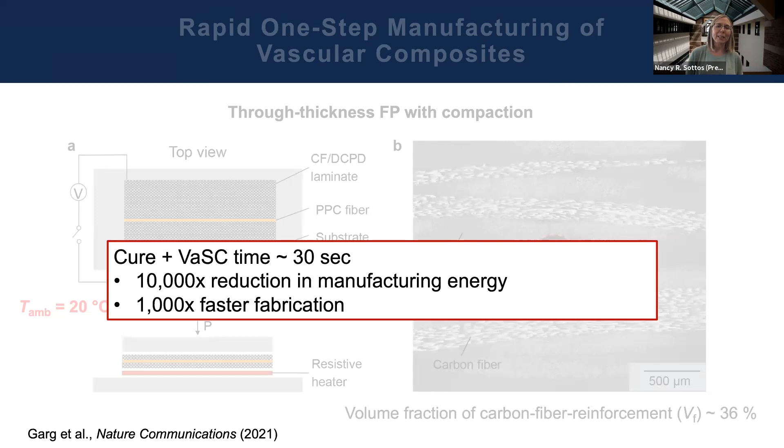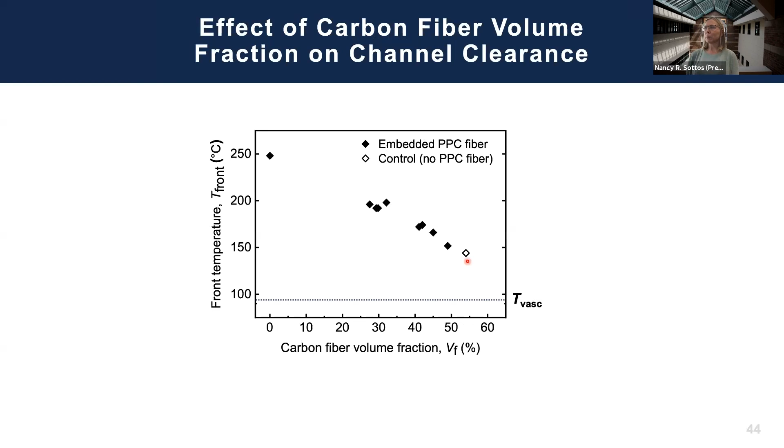We've been working on the effect of carbon volume fraction. Philippe's group has been doing the modeling, and through this compaction process and keeping insulating plates, we've made it all the way to 50% volume fraction, and we're pushing forward. There's work in progress right now to push to higher volume fractions and also go to more complex networks.

So, to summarize: frontal polymerization enables rapid processing of composites. Through the use of these inhibitors, we can form fairly complex components and parts, either from liquid or gel state. We've gotten high Tg carbon fiber composites in relatively short times with low energy, and we've demonstrated a method to make multifunctional structures like this.

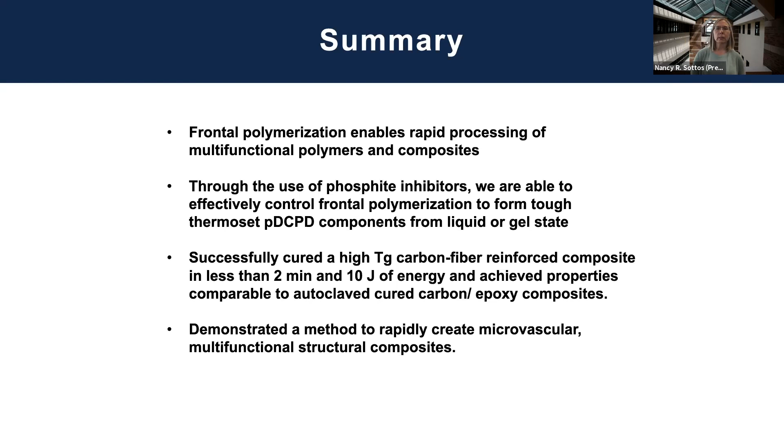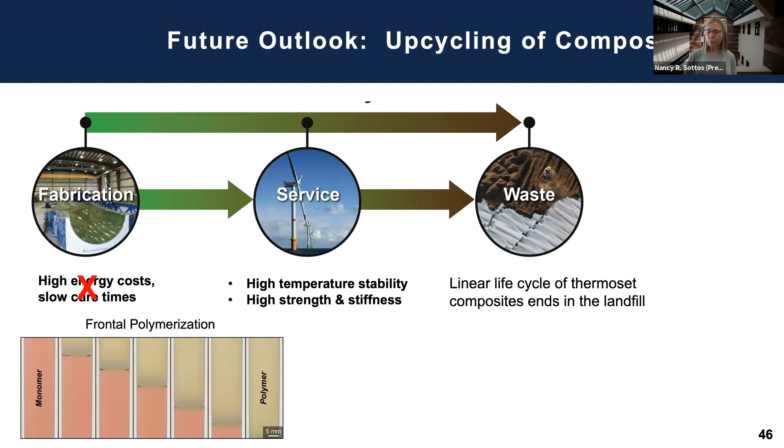Through this talk I've told you about a method to reduce the energy costs of the fabrication process, and what we're working on now is interesting methods of upcycling. There's been some beautiful work by Jeremiah Johnson's group at MIT on bringing in cleavable units, and we've been collaborating with that group to incorporate cleavable units into our frontally polymerized system. Our hope is to be able to cleave these monomers and recover and upcycle them into usable products. So that's what we're thinking about for the future with these tools as well.